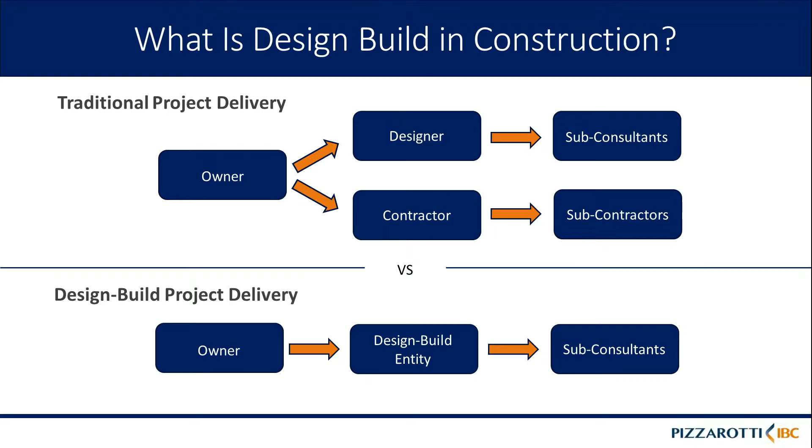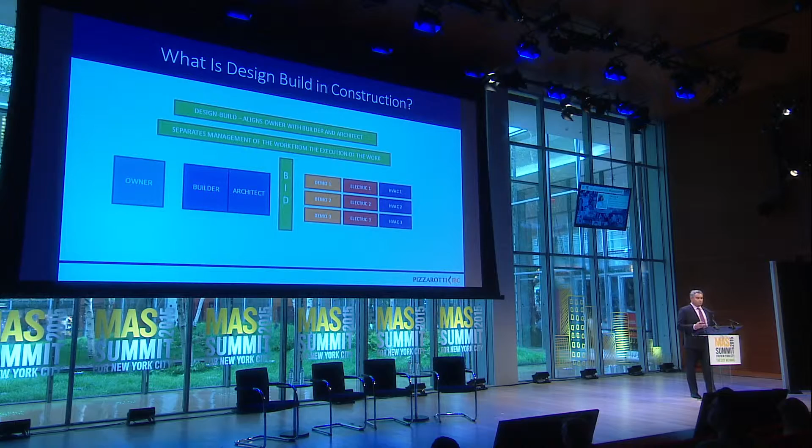In more detail, with traditional project delivery, the owner or the owner's representative must manage two separate contracts. Ownership becomes the middleman, sometimes settling disputes between the designer and the contractor. In this scenario, as we all know, the relationship between the designer and the contractor can easily become contentious, and the parties can blame one another for delays and cost overruns.

With true design build, ownership manages only one contract. With a single point of responsibility, the designer and the contractor are on the same team, providing unified recommendations to ownership, mostly regarding changes, and those changes are addressed by the design build entity as a team and not used as excuses.

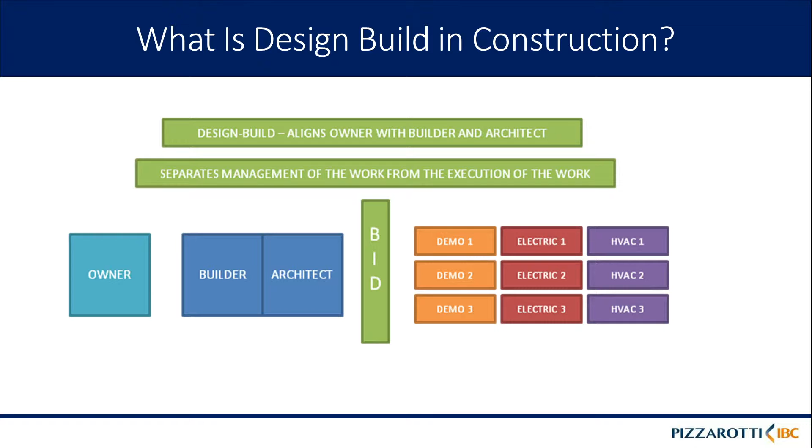Where are we with design build in New York City? The design build method of project delivery dates back to the construction of the earliest and most famous structures in human history. Throughout the millennia, up to only a few hundred years ago, virtually every project was built as a design build project.

In New York, this includes the Brooklyn Bridge, most of New York City's subway stations, and most recently, the Tappan Zee Bridge rebuild. As with many things, especially in New York City, what was once old is suddenly relatively new again.

It's a new option for owners seeking viable alternatives to the traditional concept of design bid build. The use of design build delivery in New York City has been hampered by state laws and professional ethical rules, but recent legislation in New York may drastically increase the potential for design build in the public and private sectors.

For the past several decades, New York's design build has enjoyed increased yet limited use and acceptance. Wicks laws requiring separate general contracts for plumbing, heating, ventilation, and air conditioning and electrical work, and other laws, have restricted the use of design build in New York.

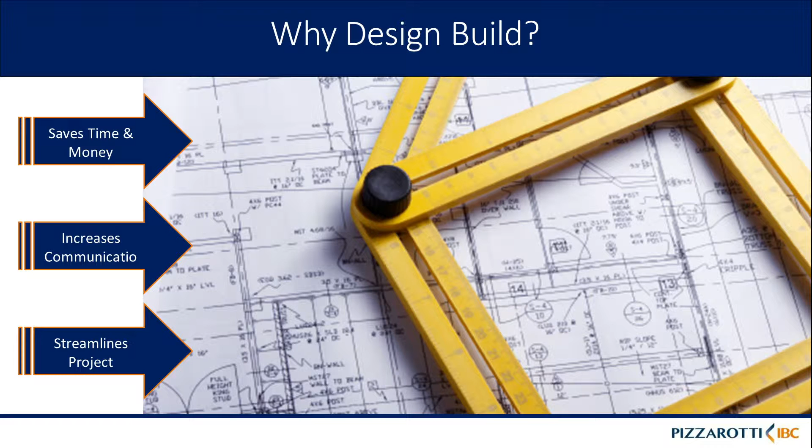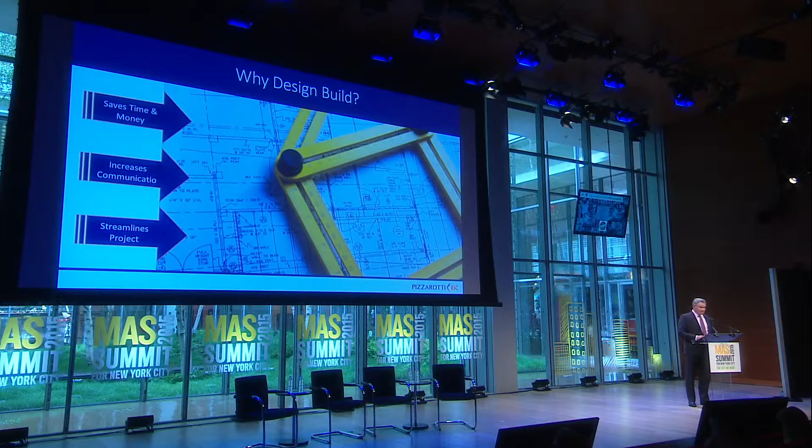Some of those advantages include: design-build creates one single source of responsibility. One major advantage of design-build is the ability to provide ownership with one single source of responsibility for all aspects of the project. Clients have a single company they can hold accountable, no questions and no finger pointing. By building a collaborative team that includes the consultants, the architects, builders, subcontractors, suppliers, as well as ownership, the design builder can ensure that ownership's goals are met.

Design-build saves time. As a fully integrated team, we can significantly reduce the amount of time from the inception of a construction project to its completion. Teamwork reduces rework and redesign. Fast-tracking allows for the design-build team to overlap design and the construction phases. Design-build delivery reduces pre-construction time by streamlining the bidding and buyout process.

Design-build saves money. 80% of the cost of a project is driven by subcontractors and suppliers. In traditional project delivery, they do not get involved until the plans are complete. By then, it's too late or it's too costly to incorporate any cost savings that they possibly could offer. As a part of the design-build team, this input is provided at the start, and it can be incorporated into the design at no additional cost or time delay to the project.

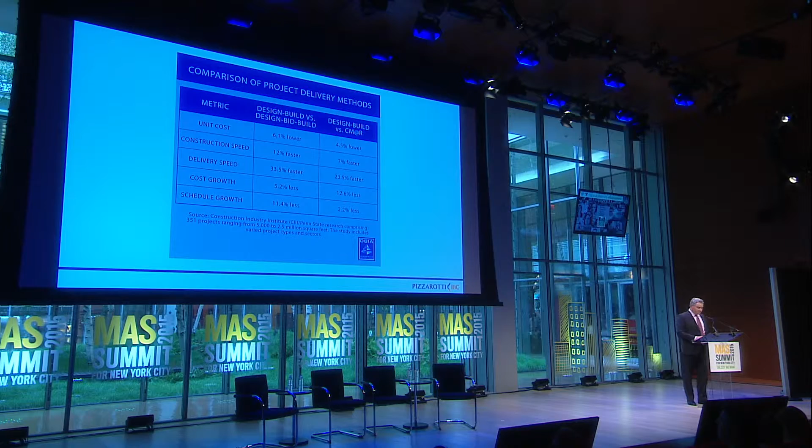The Building Smart Alliance estimated that as much as 50% of the cost of a construction project is waste. In the book The Commercial Real Estate Revolution, Rex Miller estimates that of the total cost of a project, 12% is spent on wasted material, 7% is wasted due to poor planning, 10% is wasted due to rework and avoidable collisions between trades, and 8% is wasted by the production, transportation, and pricing of construction documents.

In a quick comparison of design-build versus design-bid-build and design-build CM at risk, design-build shows significant advantages, with unit costs being 6.1% lower and 4.5% lower, respectively. Construction speed, 12% faster and 7% faster, respectively. Delivery speed being 33.5% faster and 23.5% faster. Cost growth, 5.2% less and 12.6% less. And schedule growth, 11.4% less and 2.2% less, respectively.

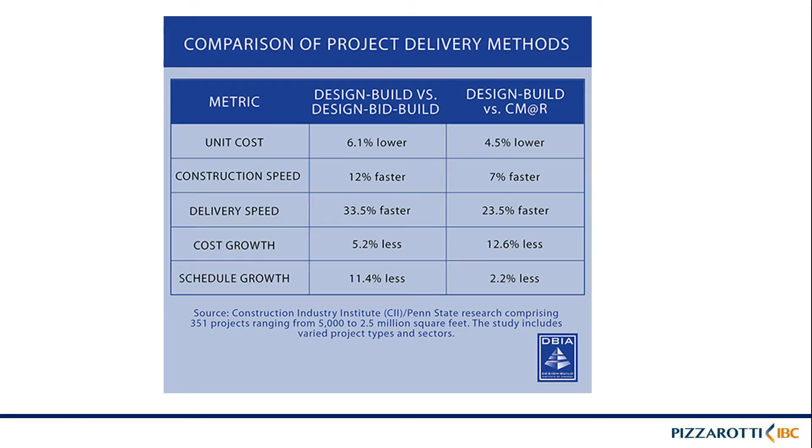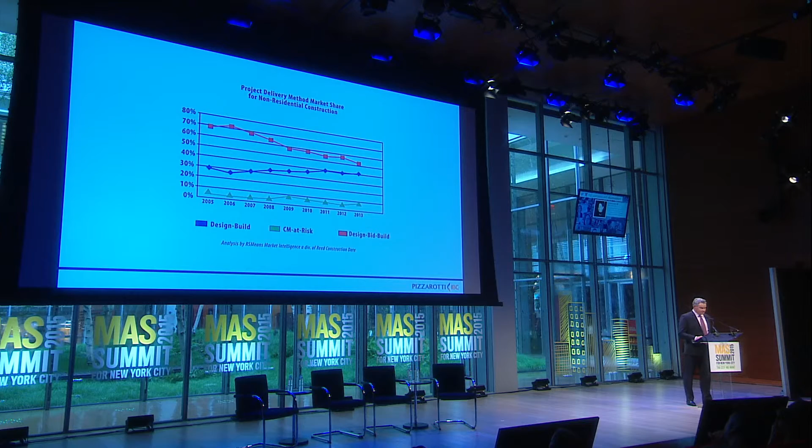Design-build is intended to be a highly collaborative, fully integrated process that is built on trust, mutual respect, teamwork, innovation, and creative problem solving. Design-build unleashes the power of the team to deliver projects faster, better, for optimum cost, and for the best value for the money, for the time and the effort involved.

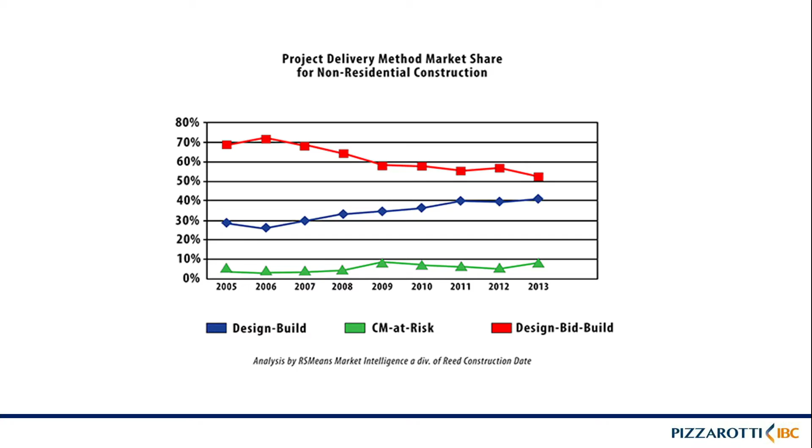Owners find that when design-build is done properly, their level of engagement with the team is more meaningful than experience with other delivery methods.

Design build in New York City. Is there value? My opinion is yes. Thank you for your time.